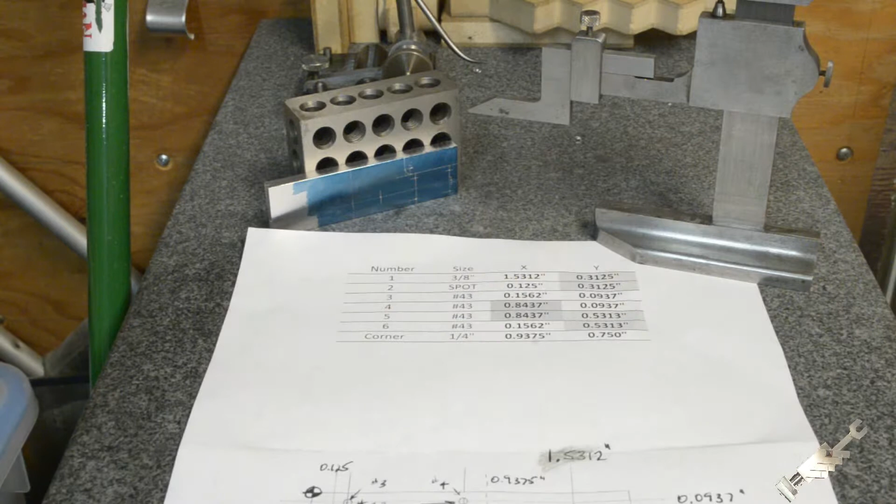Alright, so what I did here was I drew a rough, not to scale... let me bring you in here. This isn't to scale. This is just a drawing of the frame. Over here, I don't know if you guys can see.

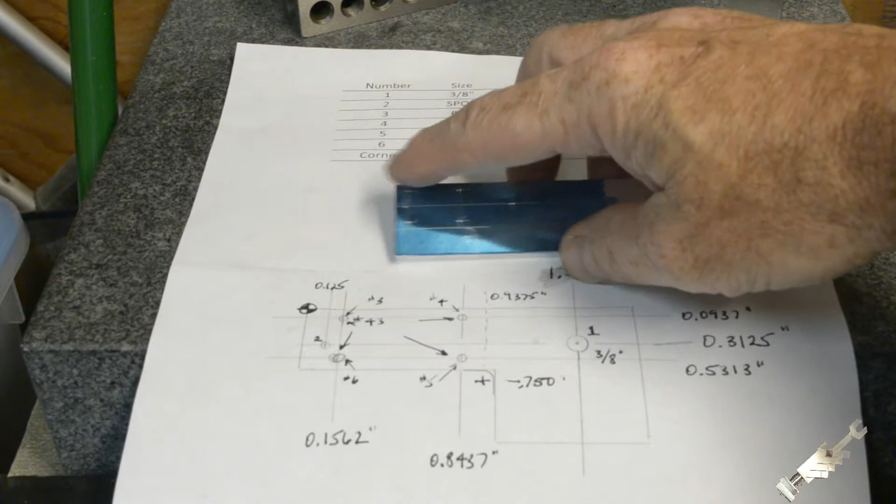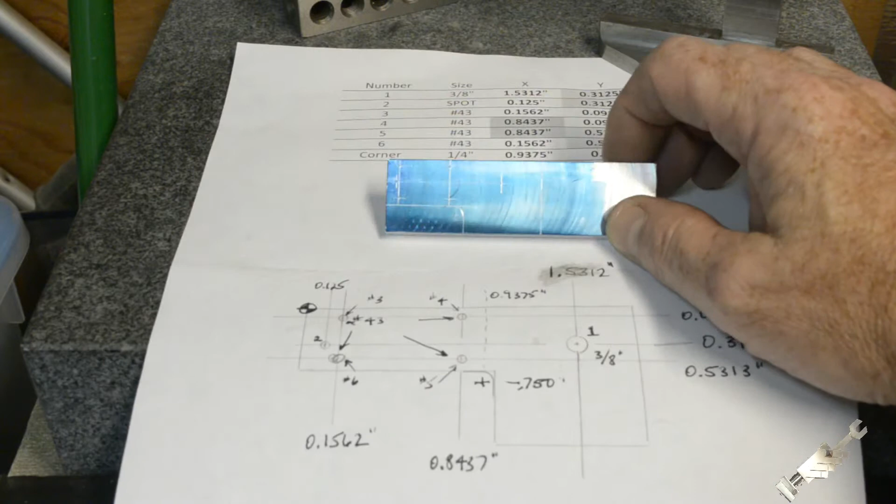I just took all these dimensions and I picked a reference point, and I picked this top corner. I picked this top corner as a reference point, and I just went and took all my dimensions off of this, and I laid everything out as an X and a Y coordinate. And using my height gauge, I scribed all the marks, and I'm going to bring these marks over to the digital readout once I get this set up in the mill, and I will precisely locate each of these holes with these coordinates.

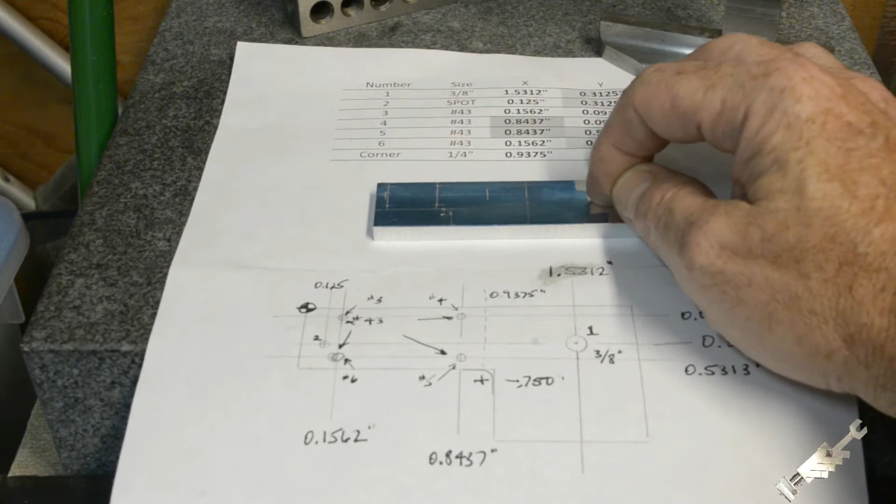I just laid it out as a double check, just to make sure that I don't lose track of anything, and it gives me a better visualization of it. So I'll bring you back when we get this piece in the mill, and we'll drill some holes.

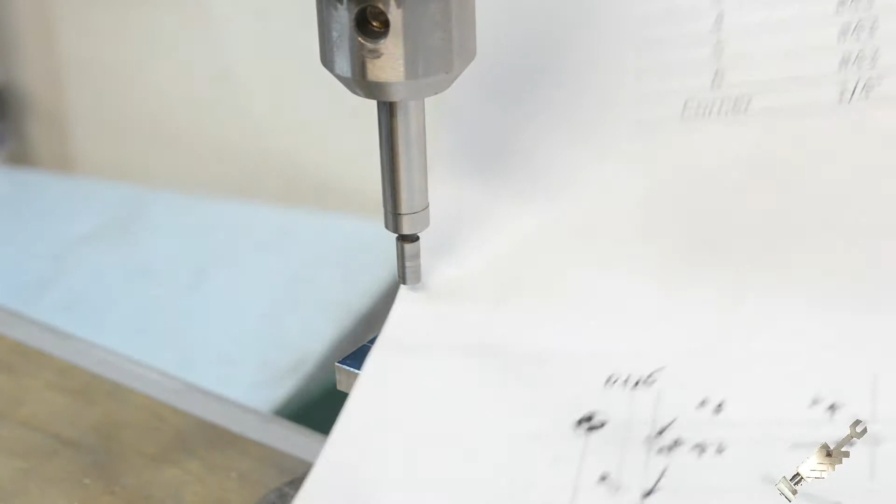Okay, so off camera I used my edge finder, found the edge here and here, and zeroed it out. So right now this is centered right over the very corner, which I said I was going to use as my reference point. So the piece is laid out like this here. So now what I'm going to do is let me swing you over to the digital readout and try to get you into focus here.

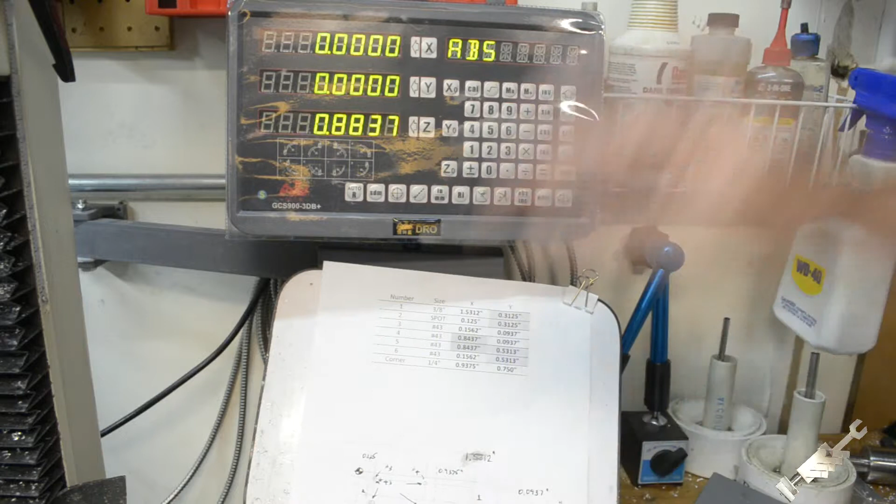Okay. How's everything going to fit in here? Okay. So what I'm going to do is program each of these coordinates in as subdatum points and put them into the memory on here. So I went ahead and numbered each of the features, or the holes in this particular case, 6 holes, and then I just want to drill a 1/4 inch hole through here, and that'll be the radius in this corner. So let's go ahead and get started.

As you can see, the digital readout is zeroed in the X and Y coordinates, and we'll enter subdatum 1, and we'll put the X coordinate in for that. So that is 1.531 inches, and the Y coordinate will be 0.3125. Okay, so those will be the coordinates for hole number 1.

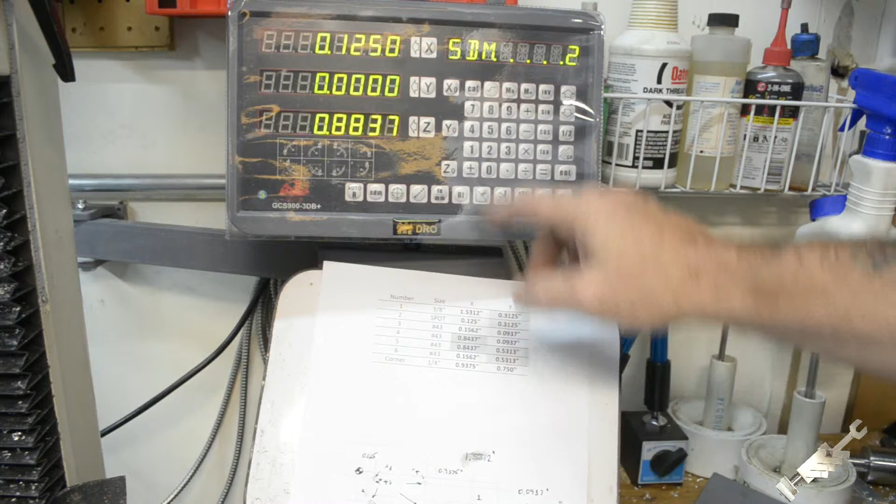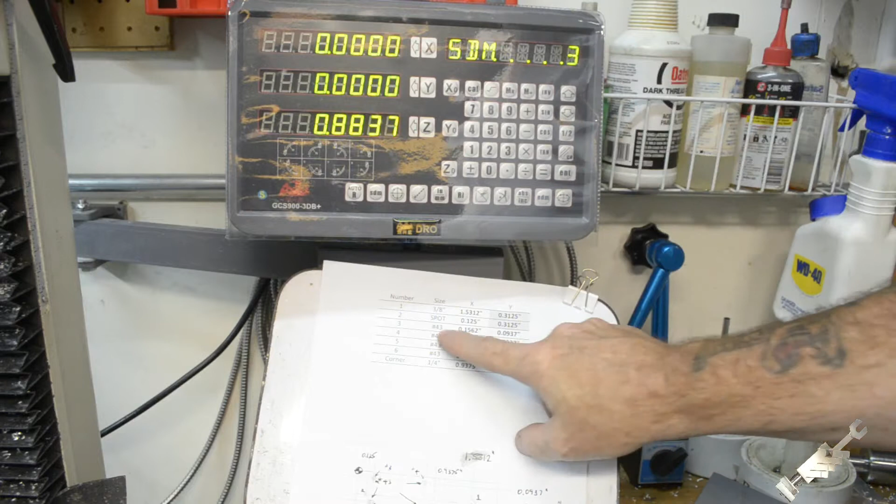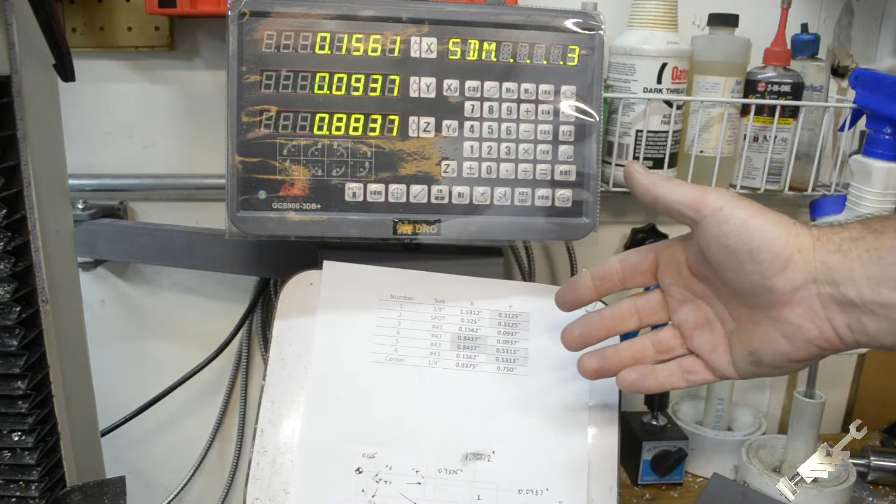Datum point 2, I'll move down to here, and the X coordinate will be 0.125, and the Y coordinate will be 0.3125. And the third, the X coordinate will be 0.1562, and the Y coordinate 0.0937. Enter. And you guys get the idea. I'll go through and program the rest of these coordinates in, and I'll bring you back when I'm ready to start drilling these holes.

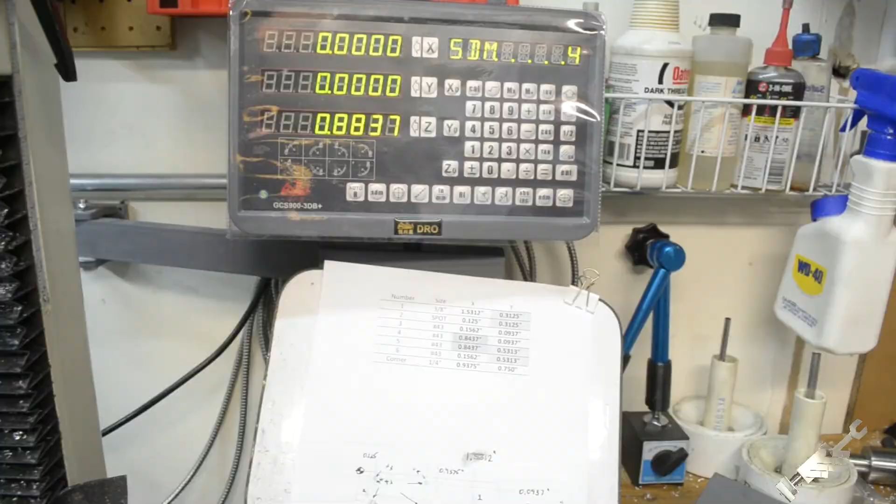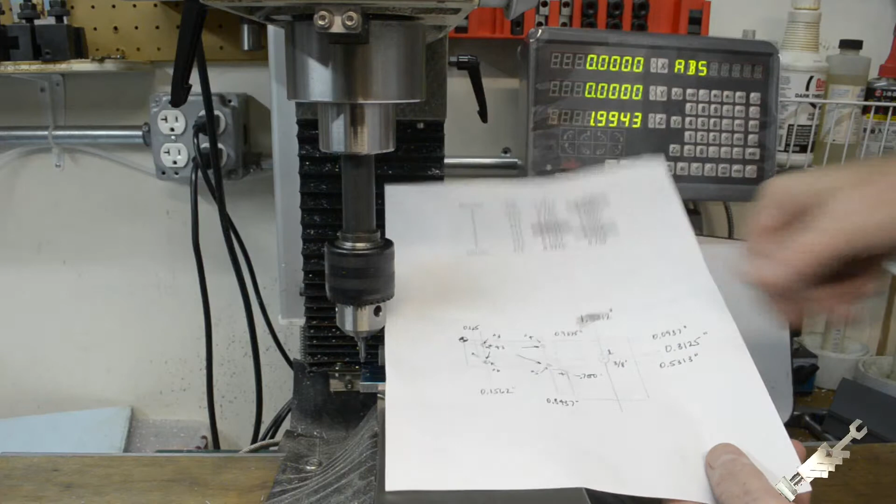Alright, so what I did was put a small center drill in the chuck here. I zeroed out the digital readout, so now this is right on my reference point, which I spoke about earlier. I picked this point here to be the reference point. So all of these holes are going to be referenced from that corner there. And you saw me put some of these coordinates into the digital readout.

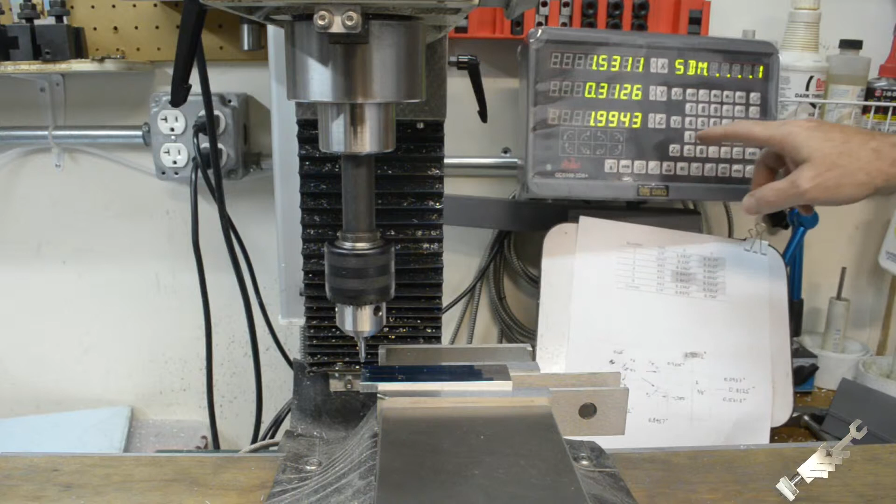So now this is on 0. Now I'll go into the subdatum. This is number 1, and those will be the coordinates for number 1. So I'll just move the table until those are zeroed. There. Okay. All right. And this will come into that, gets zeroed out. Okay, I'm going to lock these down. Okay, so now, if you guys can see that, that's right above that point there, where the crankshaft bearing will eventually go. So let's get that center drilled.